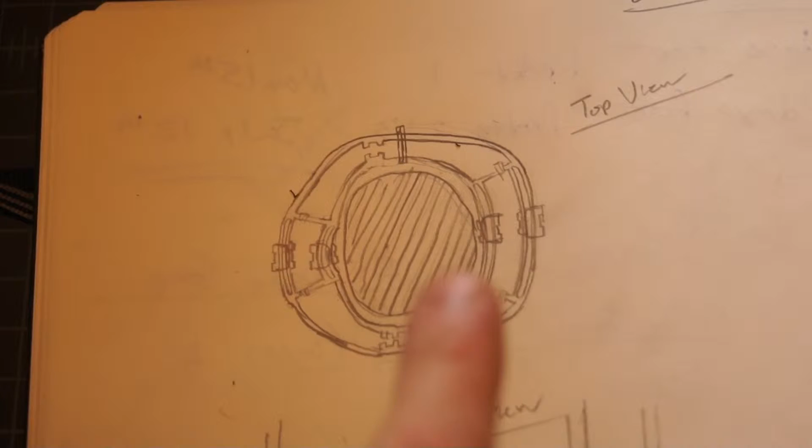Let me show you what I've been working on, what I've been drawing. So right here, this would be my body, and these would be the ribs that come around. These are my sliding joints, so this is essentially a doubled, deep, superficial exoskeleton. That's the top view.

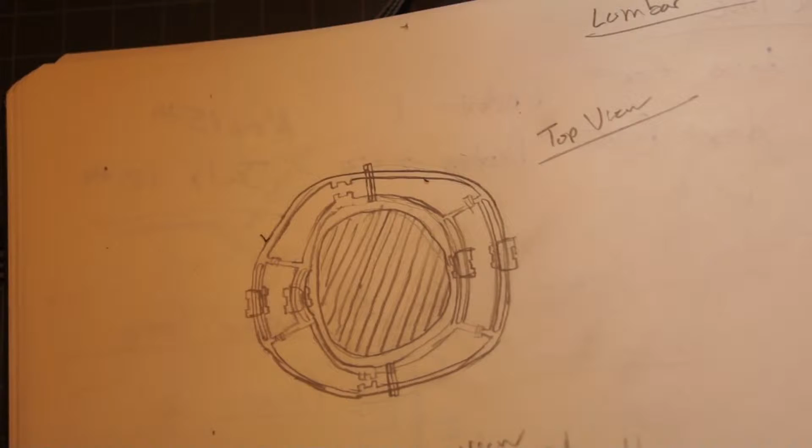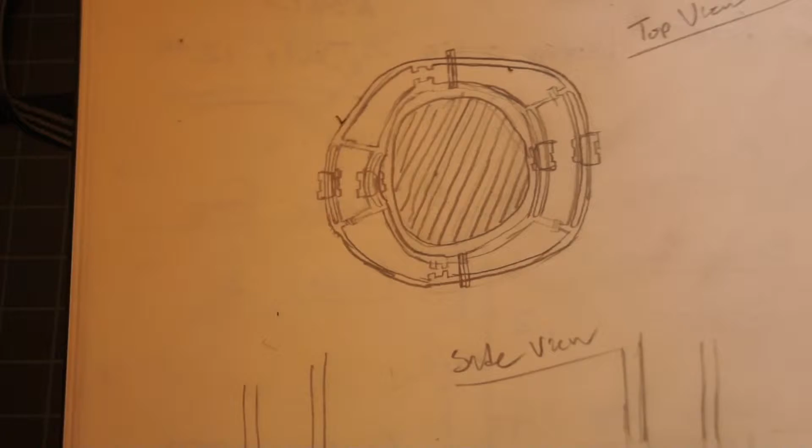I think right here they'll come together on that side and that side, kind of coming into one single joint, like I was doing on the inside of the leg and the inside of the arm, because your arms would be over here, in order to make those a little smaller so you can put your arms in more easily.

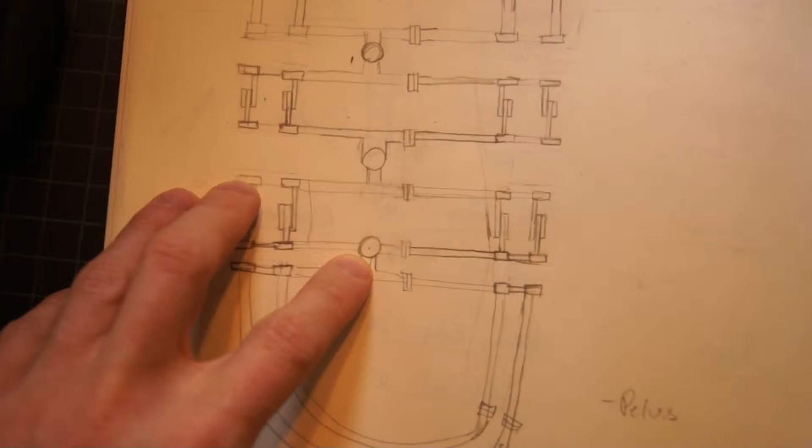Over here is a drawing, not very well done to scale, but showing how this works. So this is three side joints to allow you to bend forward and backwards. This is a side view, so your nose would be up here. These joints allow for side to side motion, and the transverse joints will be in here and in here. I guess they could also be in here, here, here, and here, could be in four places, I don't know about that.

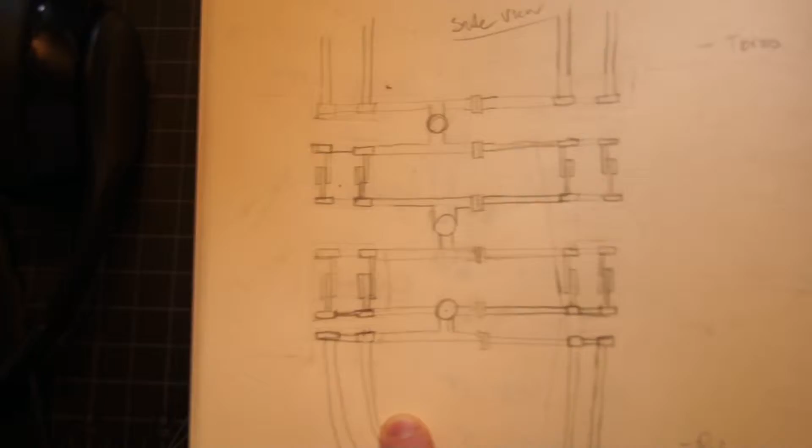So this was just playing some stuff out. This is what I'm actually more excited about here. I'm also thinking about how I'm gonna hold this from both sides and put it on, so I'm thinking about the stand.

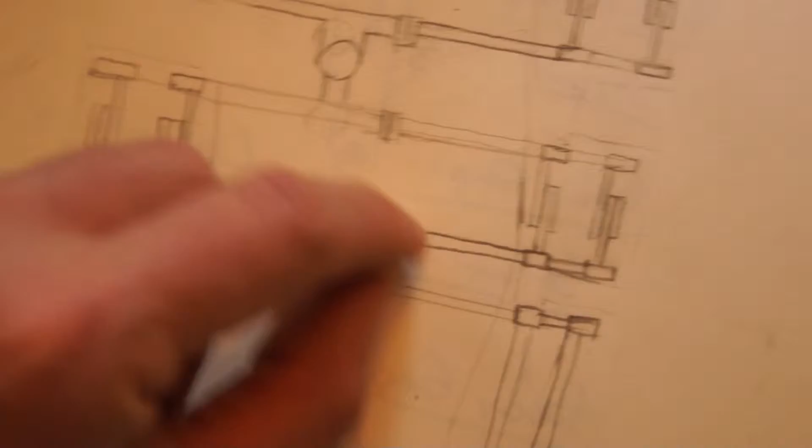What I'm thinking right now is there'll be a part that comes in and comes up close to where these pieces right here represent where they would bolt on. They would come on next to here and slide through there to hold it. Actually, there'll probably be pieces of sheet metal in here that can go up and down like an accordion.

Because of that, there's probably going to be a magnet that holds onto these, turning on and off, like one I have in the garage, I'll show you. A magnet will hold it there and hold it there, so there'll be holding from the back side and the front side, grabbing all these. Then the bolts will go across through here, with a hex, like an Allen wrench essentially, a hex nut to tighten down coming in this way, like this right here.

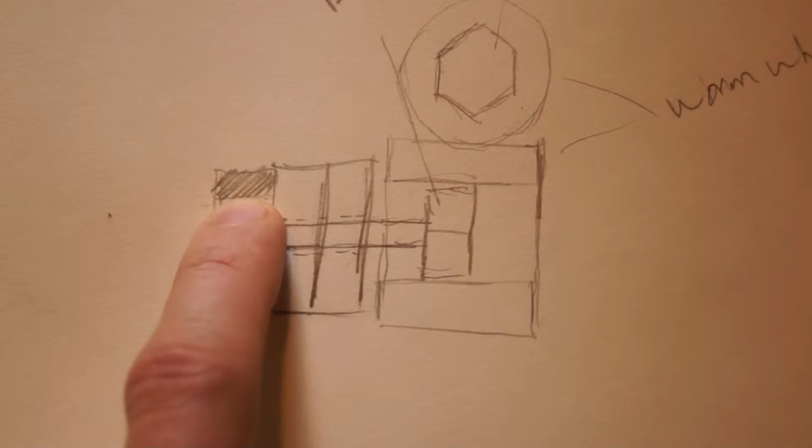So this will be the bolt-on piece and the bolt-on piece, and this is going to be the nut back here, encased in 3D printed plastic so it can't slip around. With the hex, this will be a 3D printed part that's... sorry, my memory card ran out of space. Anyway, this is going to be a nut encased in 3D printed plastic.

These two come together, this bolt's going to be in here, able to slide back and forth. This will be fixed in some way, and this will be a worm wheel connection between these two.

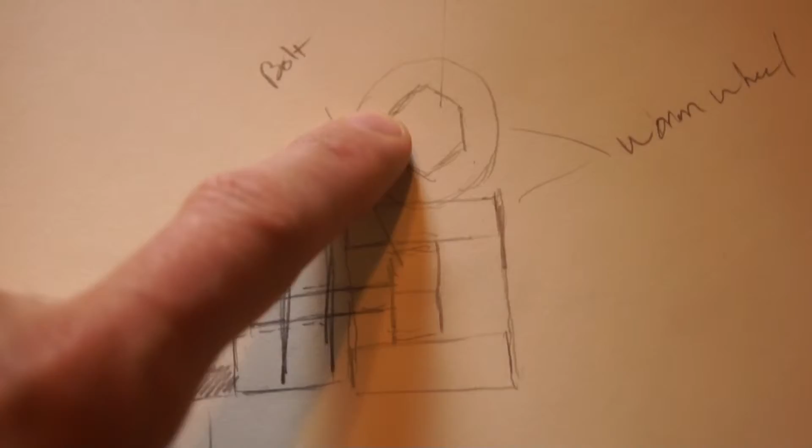What a worm wheel is essentially, let me show you. This is a worm wheel. The worm can only spin the wheel, the wheel cannot spin the worm. When you twist the worm, it spins this, which engages and meshes with these teeth, which spins the wheel. So that's what's going to be here.

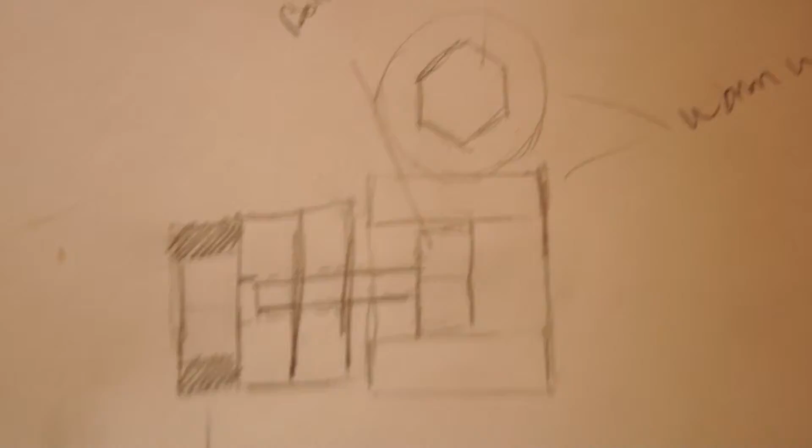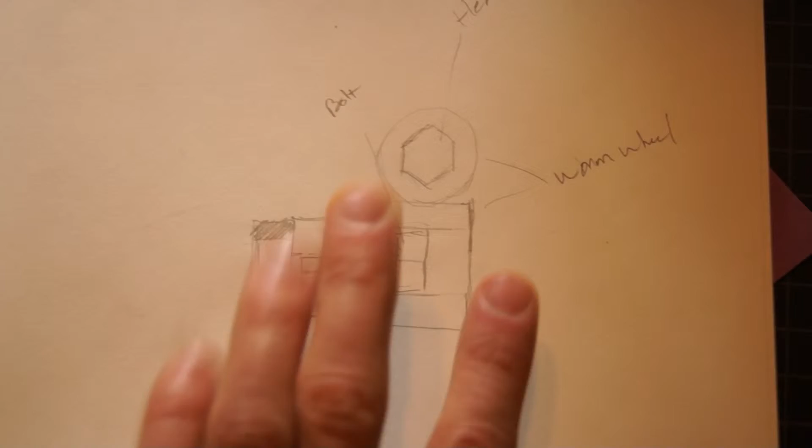This will be the worm, and this will be the wheel, and it'll come in straight sideways and bolt on this. What's nice is it'll keep everything very clean and flush, with just one little spot, making the skin a lot easier. I'll put a hole right there and one spot to bolt it in. I could even water jet that hole out so it's perfect, with other holes for mounting so it bolts up really nice and flush. The worm wheels will probably be 3D printed. That's the idea right now.

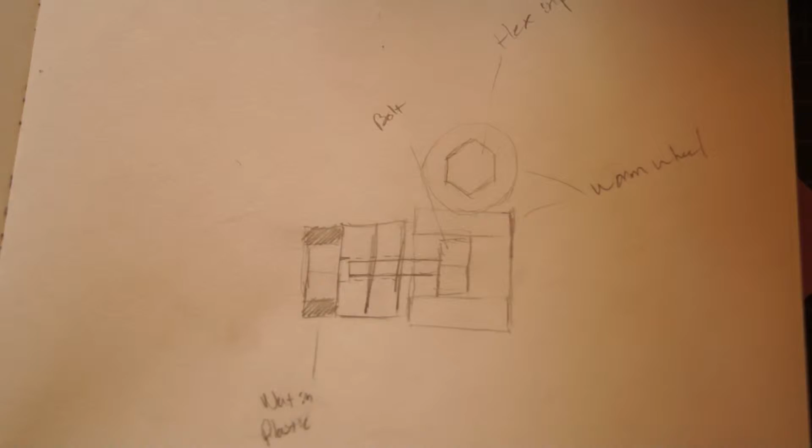I'm going to have to do some experiments to make sure they can tighten strong enough so they don't slip loose. But the nice thing is they'll be in here and won't really be able to slip, because this won't be able to turn as long as it stays tight enough not to move. This won't be able to twist, so it'll be stuck. Even if it's not super tight, it'll be stuck here, and it'll also be glued on at the end, so it should be very strong.

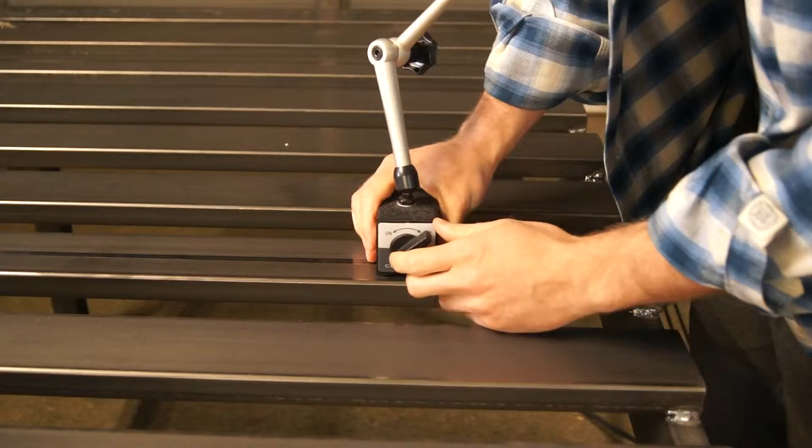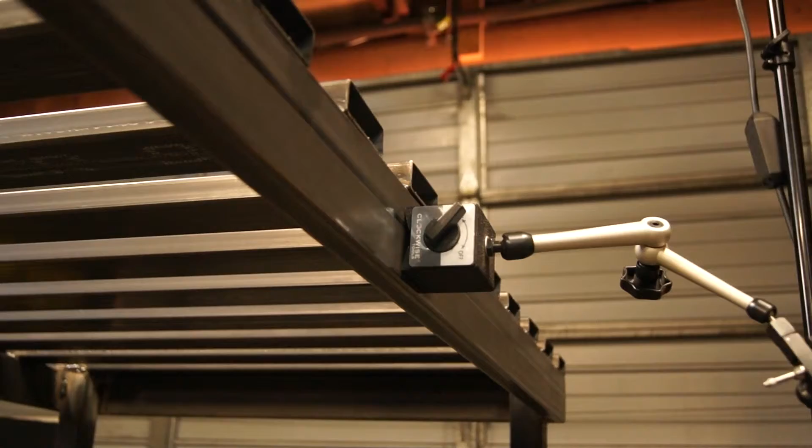If you've never seen one of these before, this is a dial indicator for machining. If you press on it, it'll tell how much that's changing down to, I think, half a thou. They're pretty accurate. You turn this on like this, and it's magnetized. Turn it off like this. So it's not an electric magnet, it's a permanent magnet in there, and that's magnetized now. So here you can tell it's coming off and on.

I think what's going on, since it's not an electromagnet, is there's some kind of yoke made of metal, so when it pulls it up the magnetism goes somewhere else, and when it pushes it down it touches the steel. I'm not entirely sure how they function, but since we're making this thing out of steel, and when I have stuff water jet cut it's ferromagnetic, I can make the yokes and just buy the magnets. That way I don't have to buy a whole bunch of these, I can design and build them myself from permanent magnets. It'll require me to understand how these function a bit better, and I'm sure I can figure it out on YouTube or Google. I just haven't looked into it much, but they just come off and on like that.

Alright, that's it for the day, guys. Sorry, not a whole lot was done today. I was dragging all day because, well, you know why. But tomorrow I'm excited to start and really hit this thing hard. I kind of needed a day off anyway. Even though I didn't have a full day off, that's okay. I don't really want a full day off.

So I'm going to start tomorrow working on more sketches. I'm really trying to figure out how I'm going to hold the thing, and starting to think about how the skin is going to go on now. Now that I have the skeleton, the frame made, I've got to figure out how I want the steel skin on the outside to look, and how it's going to come together as a solid, full unit.

I'm not really too worried about the composites, I think that'll be pretty easy. One thing I'm thinking about is embedding: on the composite layer there'll be a hole. So you take the superficial frame off, and you can see the composite layer, and there'll be a hole through there, and through that hole will be a 3D printed part with a nut embedded in it. That will screw in and be where I mount the foam, and they'll be removable. I can take the bolt out and put in other 3D printed parts that have sensors in them, if I decide to actuate it. It's not just foam. So I have that pretty well figured out, I don't think that'll be very hard.